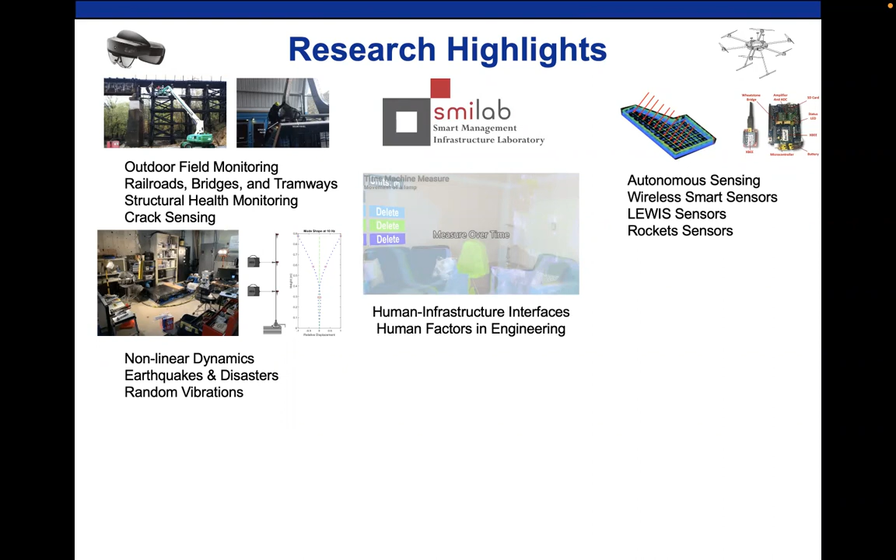With the national labs here in New Mexico, we are very lucky. We are working with Sandia National Lab, Air Force Research Lab. In particular, some of the work I present here today is with Los Alamos National Lab. They are a little ahead in terms of dynamics. We're doing some nonlinear dynamics that I never thought I would be investigating, and we're looking into these multiple input, multiple output areas of interest.

With the Navy, we have some support or ongoing efforts related to the cybersecurity of SHM. So when we have all these sensors, I'll be talking a little about community centered SHM. How can we protect from attacks that are not only physical, but also cyber attacks?

Here, in terms of augmented reality, I'll show some of the work the students are doing. One is on dynamics, another is in cracks, and another is in sensors. So let me bring this down. We have some interesting work with the students in mechanical engineering, actually, so that's why I need to get this cross-appointed. In order to be mentoring students in other departments, they recommend that you become cross-affiliated. So the University of New Mexico encourages this multidisciplinary participation.

So let's get at it with the outline: SHM, community centered SHM, then we'll talk about the human data interface and augmented reality, and conclusions.

For the infrastructure, all this decay or these maintenance concerns or repairs in America, we have the American Society of Civil Engineers. They have a community with the government, where we go and talk with the senators, and with the senators we talk about giving a grade. Actually, the senators say this report is the most useful tool they're receiving in Congress for asking for money.

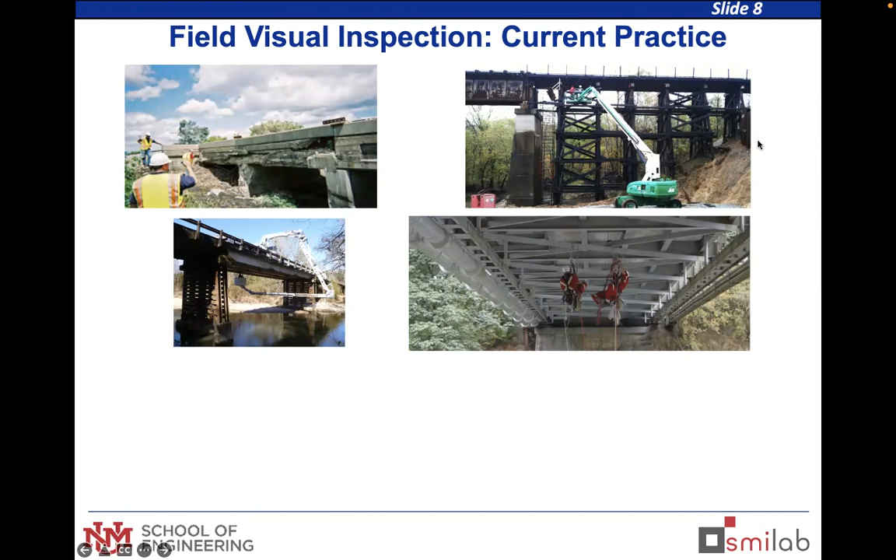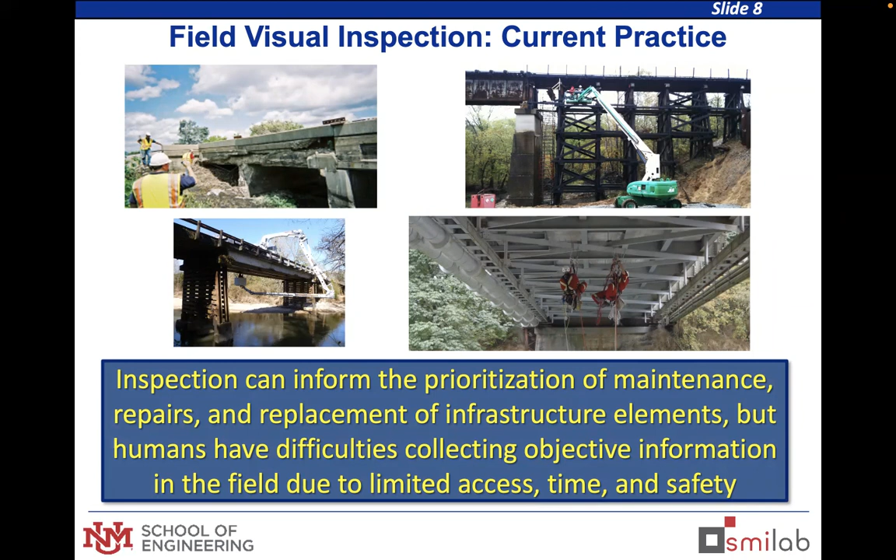Regularly looking for changes. So the core of this presentation is not replacing the human, but helping the human. The humans are good, experienced, and have knowledge, and we want to support the humans doing that great job of inspecting bridges. It could be other structures too. So today, if humans are the ones collecting this data, let's help those people who are doing the job, the inspectors.

The SHM community, we are working closely with them. I have a little video here. Let me see if I can lower the voice for the sounds. And we are collecting data from many ways, not only sensors, but also doing some robotics, instrumentation, and drones.

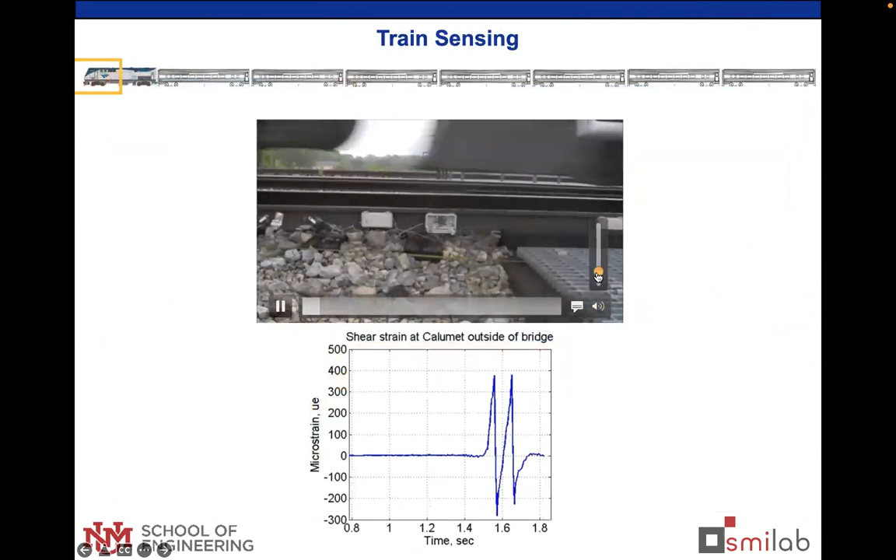And stemming from here, we have information. This is some of the work that we did at the University of Illinois near Chicago. Chicago is the hub of the railroads in North America, where with these sensors, we can obtain real-time information of the loads, the direction of the train, the speed. In this case it was an Amtrak passenger train going northbound, 80 miles an hour.

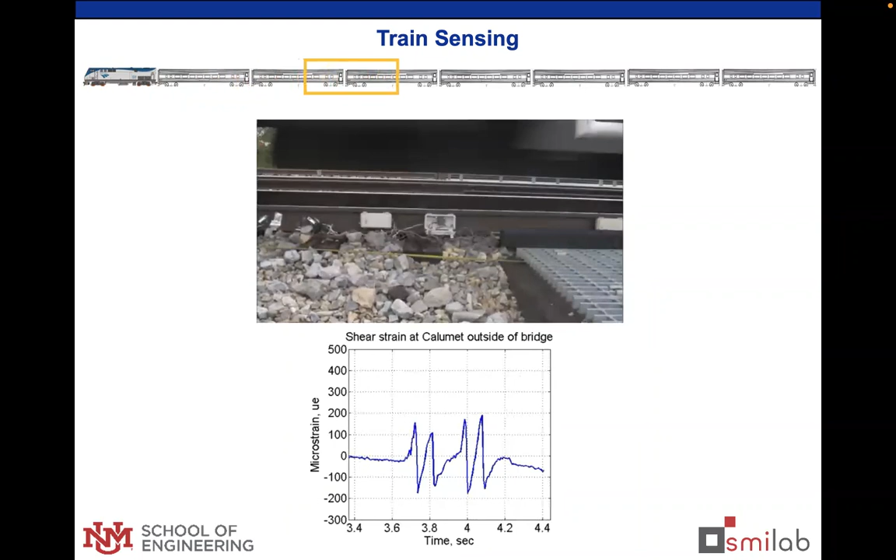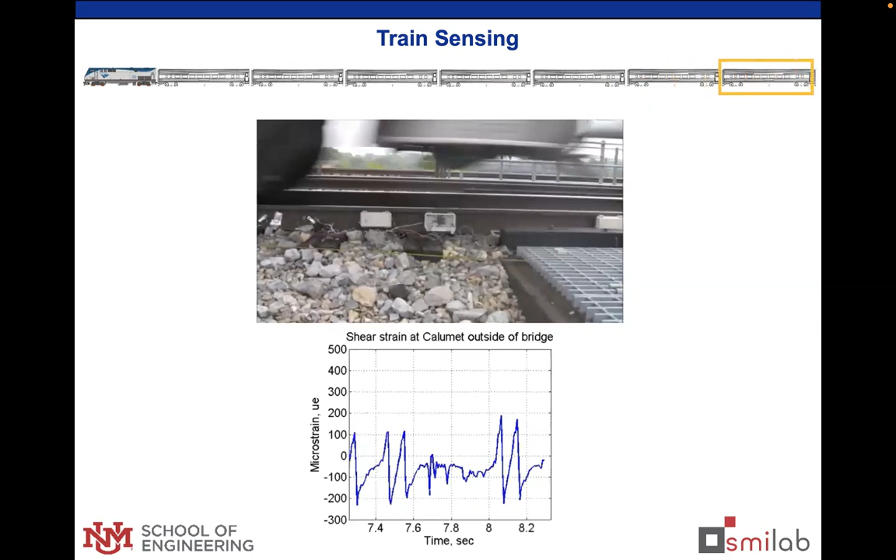I forgot to close the box, so that's why you see the vibration of that wireless sensor up and down under the wheels. That makes it look very cool. And with the strain, with the 45 degrees, we can obtain this information that will inform us of the safety, maybe improve management of the traffic, and also coordinate maintenance operations based on data. So this is what we've been doing for a few decades now, and we are very successful advancing the topic.

But one of the challenges has been the interface with the community. Some of the solutions that we found with the assistance of sensors is developing low-cost sensors. This is an approach that we do here at the University of New Mexico. We call them low-cost efficient wireless intelligent sensors. And we tell them, it's not that expensive, it's not that complicated.

And also we can change the sensor for you. So instead of telling them what they have to measure, we ask them, what do you want to measure? And then we fabricate the sensor for you. We allow the community to tell us what they're interested in measuring, and we will do it for them.

We also use it for teaching. I just wanted to shout out to the students, we have a class in civil engineering here where we teach sensors. Professor Chatzi is aware, in the International Modal Analysis Conference, we do the teaching of the sensor. So maybe next year, if you want to take this sensor class, you can build your sensor in half an hour and use it and see the data. Look at the students, how happy they are when we build this low-cost sensor.

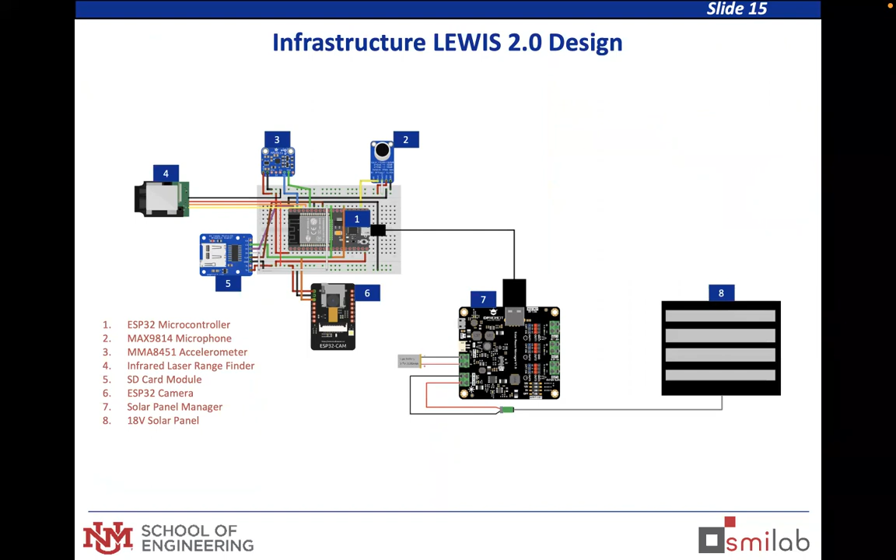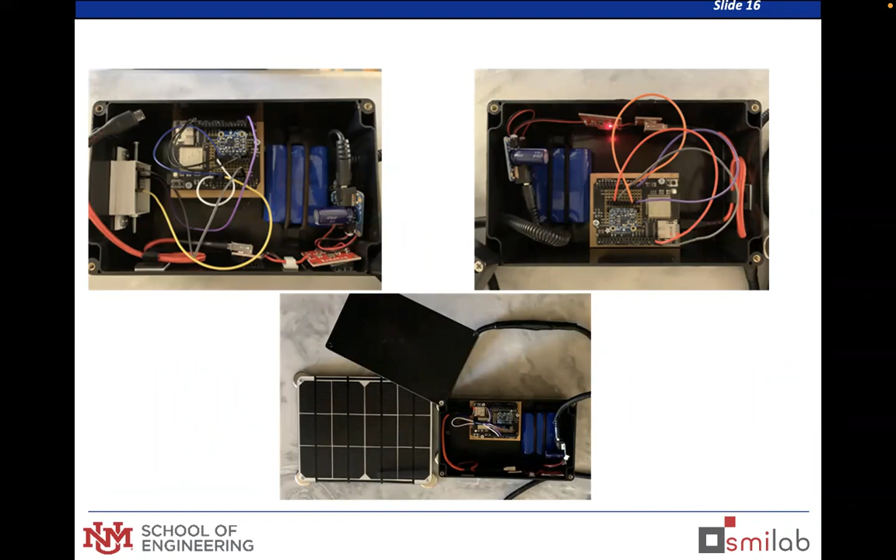With this low-cost sensor, the community doesn't worry about being charged a lot of money. And also you can tell them, hey, if you're interested in environmental issues, we can also change the sensor for you. This was work conducted with NSF and the Navy, and we developed this new generation of sensors. This was done by Joshua Murillo, and as you can see, it's a very crowded, busy box. This was the LEWIS 2.0 sensor version A.

And then we have interest in putting this out there to collect the remote sensing that we have for the community. As you can see, it's a good design. You have some level of organization, and we identify camera, sensor, water, turbidity sensors. But you can see there was a little room for improvement.

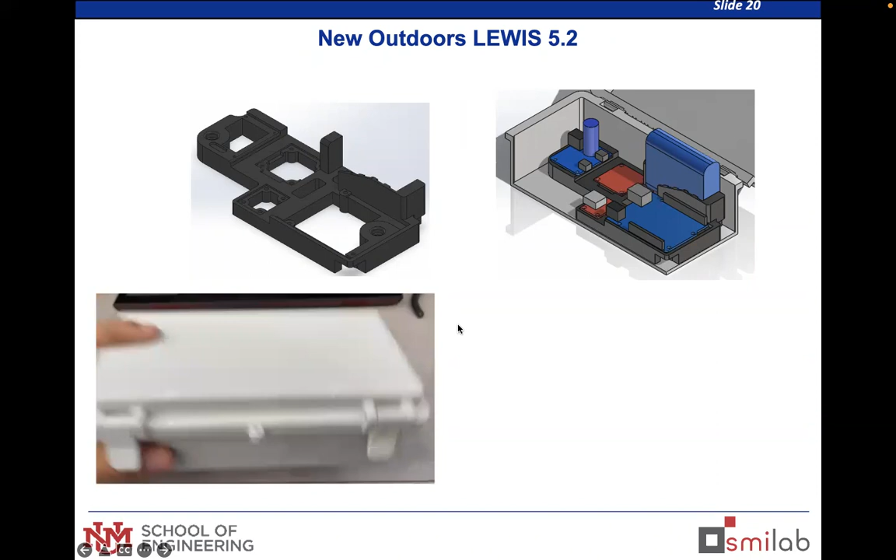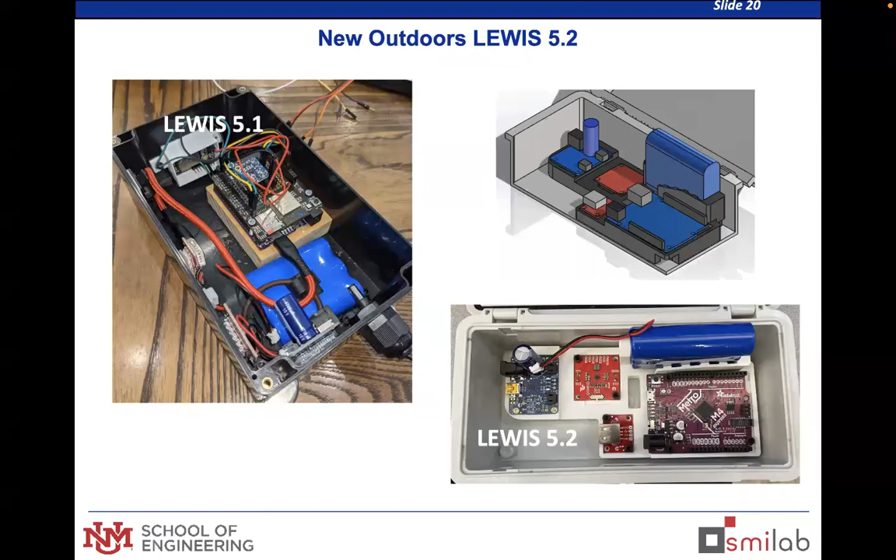So we did a version 2 based on the concern of the owner, and we developed a more advanced low-cost wireless sensor, 3D printed, done by Solomon. And as you can see, the new generation is so much better. So the community again tells you what to do with the sensor. When you allow them to criticize your sensor and you fabricate it again, you empower their understanding of your technology. So that's been one area of value.

In North America, with our recent history of collaborations with Native Americans, we identify there is advanced knowledge in the environment among our partners. We have a project with Smart and Connected Communities where community-centered research enables the adoption of technology, and that's what we've done here with the Ohkay Owingeh in New Mexico.

They are the ones who informed the sensors. When we told them we wanted accelerometers, they said, hey, we want water levels. So that's what we did for them. We developed a low-cost sensor where they can measure flooding in real time. They can use it for emergency planning, and they have these fragility curves for community-informed decisions. So instead of telling them what they have to do, they tell us the framework they want us to develop, because they're very interested in the respect that water is sacred.

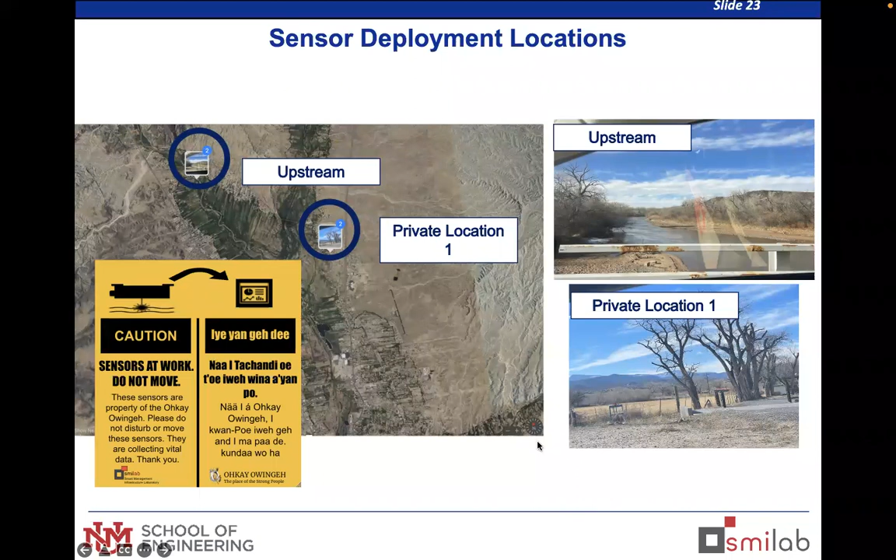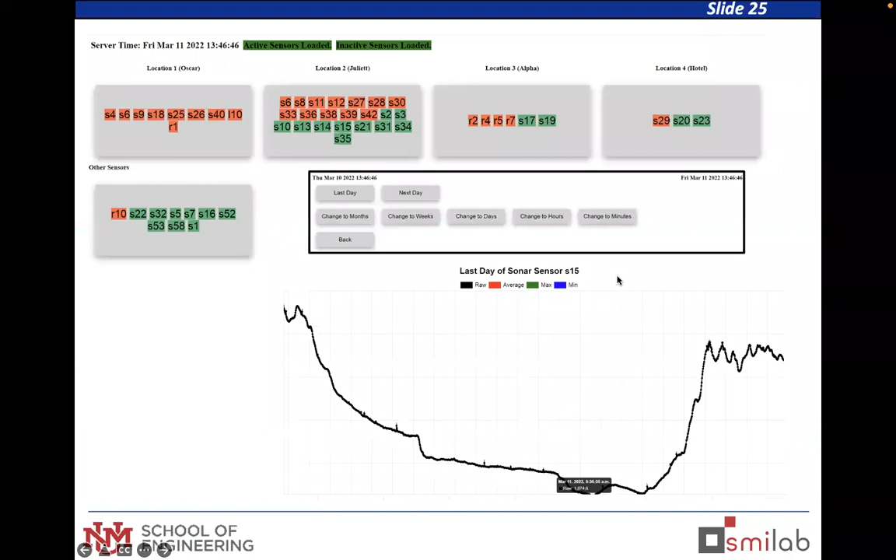This is the interface where we have these water sensors shooting down to the Rio Grande and collecting the change of water. We have this interface where you can see the water levels — this was from a couple of weeks ago. So it's been a very successful community intervention.

Let's scale down this trust in data to the human level, and I'll show you why this is important. When you have this structure with the inspector and you're talking about real-time visualization, if the inspector doesn't see the sensor data in real time, they don't trust it. Also, the database being modified with this sensor data has to be usable for decisions or liability — they want to use it for management and make decisions in real time. So those are the challenges we identified between the human inspector and our sensors.

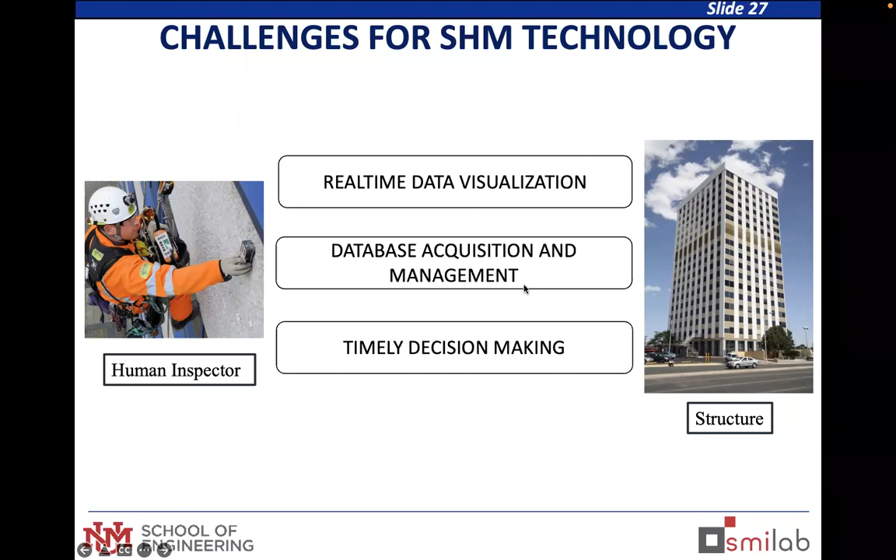So we're trying to make it very clear, in the event of an emergency, why the human-infrastructure interface is important. If you want to rescue people or make timely decisions during a disaster, you need to share that data and give the human the ability to change that data in real time. So this automation helps humans better interact with their environment — the data is there to help humans interact with their environment better. That's what we're trying to do.

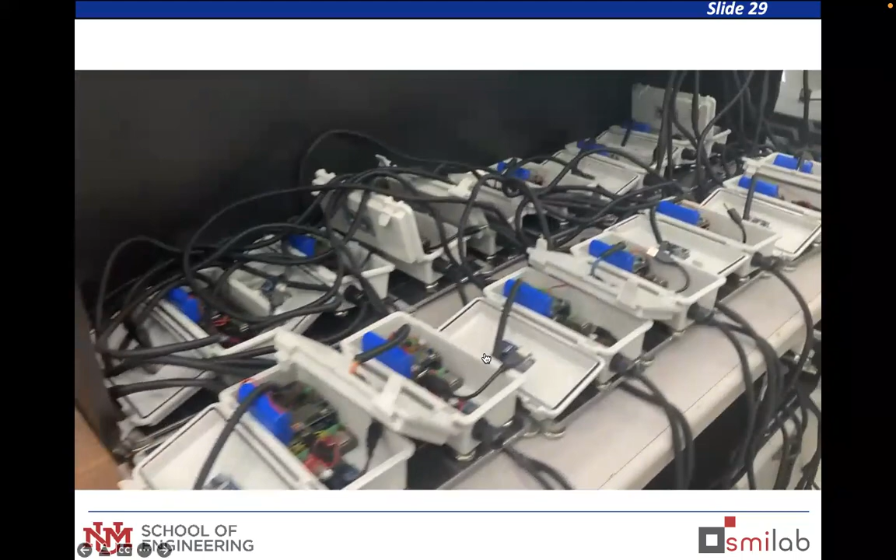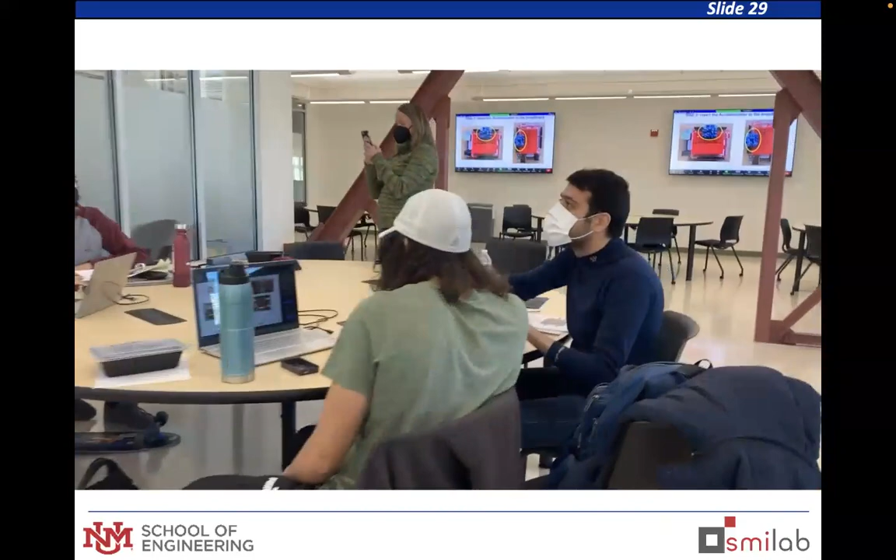This is a short video about how we build this thing. These are some of the 3D printers where the students create hundreds of sensors for the Ohkay Owingeh. This is our approach — teaching the class where students build the sensor in 30 minutes. You can see some of the Navy guys there teaching the class, and this is some of the building against the clock. When you build sensors in half an hour, you trust the data from that sensor the same day. So we're changing civil engineers' fear of sensors by actually teaching them to build one.

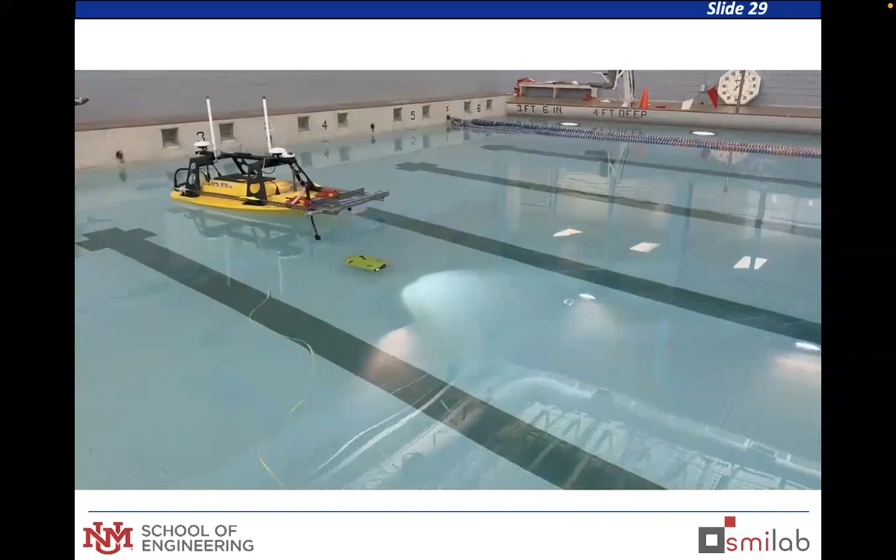This is in California, one location where the Navy wants us to measure the water level in the sea instead of the Rio Grande — no problem with that. This is an upcoming effort: we're going to do augmented reality above and below water. This is the chasing of the underwater vehicle with the boat; we have some of our sensors mounted on the boat.

We're also looking into human-machine interface, maybe the quality of the interface below water. And at the end of the presentation today, I'll show how we can conduct safer inspections out there on the mountain near Los Alamos.

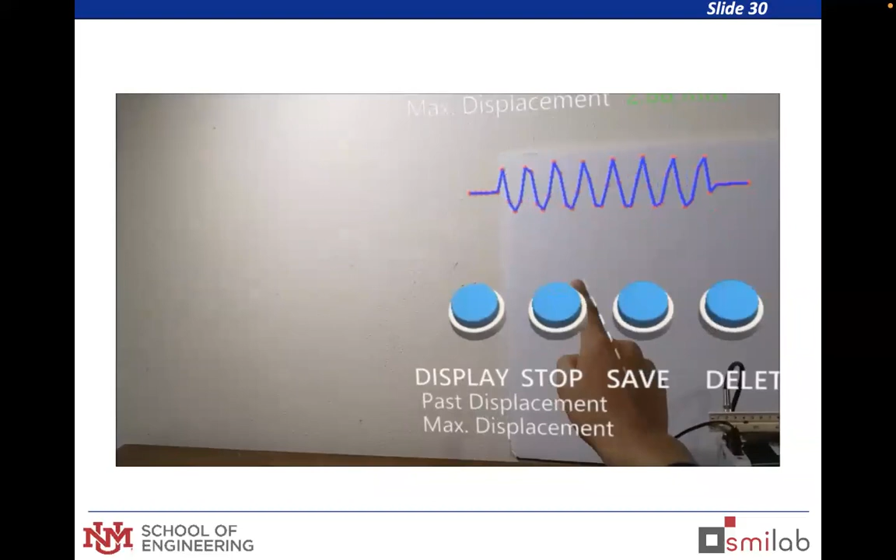The data you see here on the screen is programmed with augmented reality. We do everything with Unity. So we not only build the sensor, now we program everything in Unity so the inspector can see the displacement in front of them.

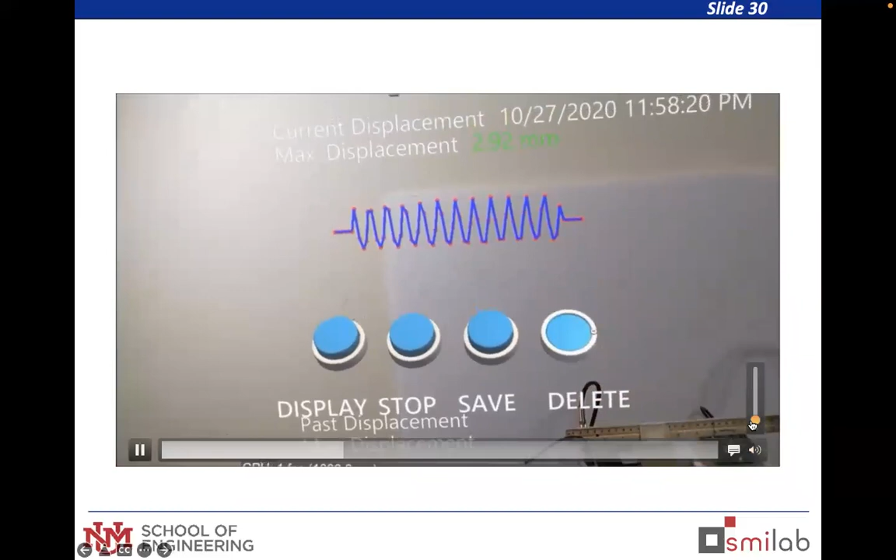This was done during COVID, so in reality we were not out in the field — this is in the apartment of the student. The train is inside the apartment, moving right and left, and with this movement we can change the decision. The decisions we made before concerned the speed of the train.

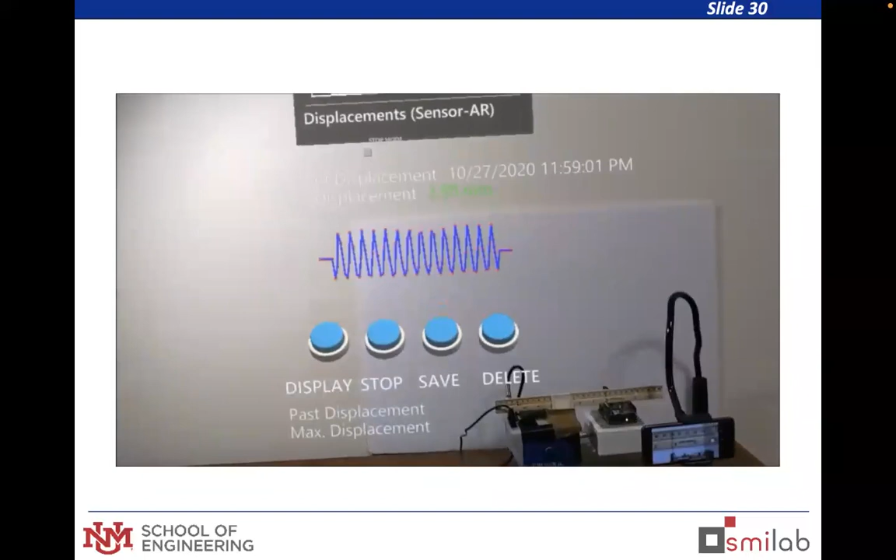If you see that the displacement exceeds a threshold of concern, you slow down the speed of that train. That's the decision that the railroads make. So instead of telling them to look at the data at the office, you look at the data on the bridge in real time. The student was Marlon Agüero, he programmed everything that you see here. So one message I give for those interested in augmented reality is it's 100% about programming. If students don't like programming 100%, then they should look for another topic.

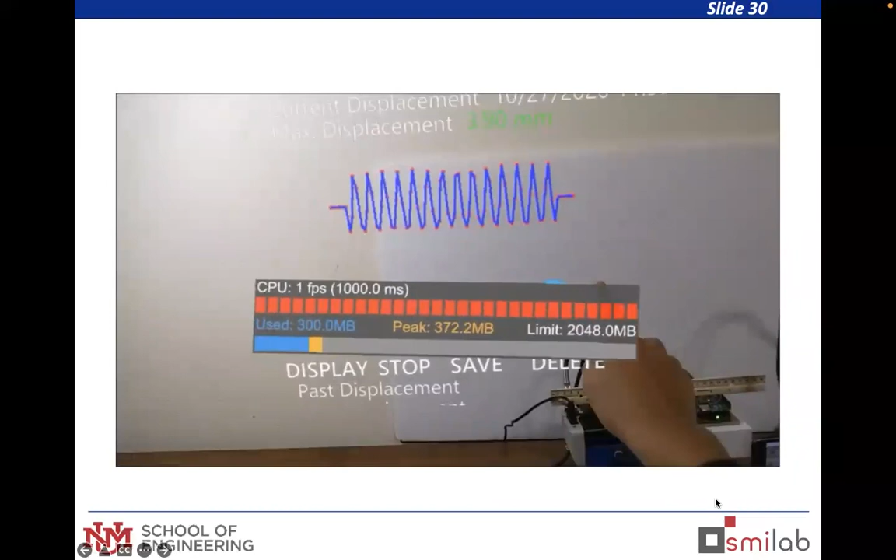This is a collaboration with Tao at the Chinese Earthquake Administration, where we hit a railroad bridge and wanted to do the inspection in real time with augmented reality. Actually, this is a 5 year old video. This inspector cannot carry iPads or iPhones, because they also need to climb these bridges.

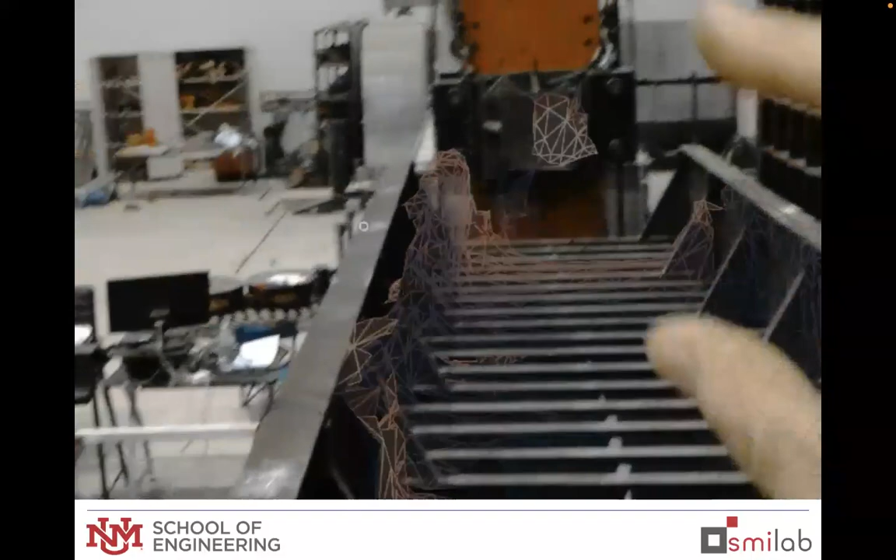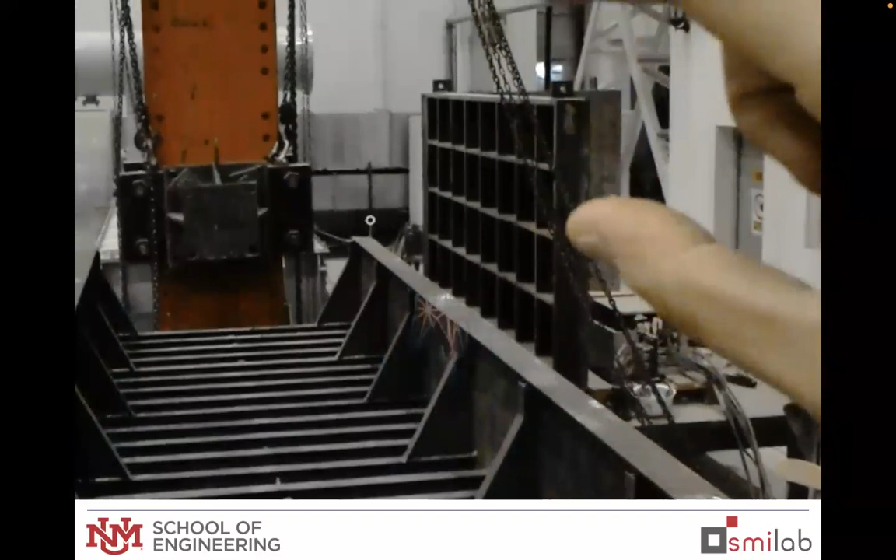As I mentioned, I dropped some cameras into the river when I did this bridge inspection. Here we climb the railroad bridge, using both hands going up the bridge to the cross beams, the knee braces, all the through-plate girder at a 1/5 scale, and collect this 3D mesh automatically with the headset. This 3D mesh will enable me to create this time machine or deploy my data. I'll show it at the end of the second half of the presentation. We are almost there, showing how these applications use this 3D mesh for information.

We are talking about human cognition, working with leaders in workforce training, development, educational psychology, and scaffolding learning. We are advancing the training of inspectors so they can accelerate known skills or acquire skills much faster. This is David Mascarenas, my colleague at Los Alamos, we've been working on this since 2016. This is the HoloLens 1, I have everything now done with the HoloLens 2.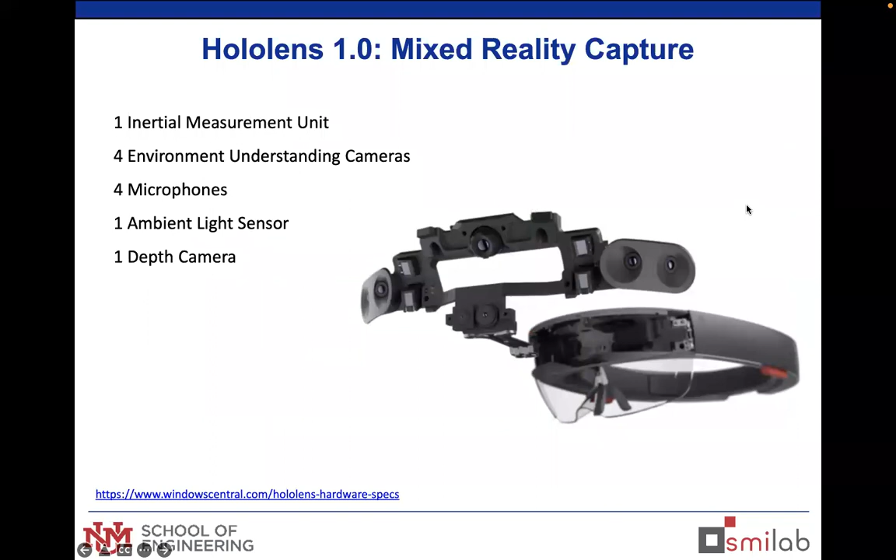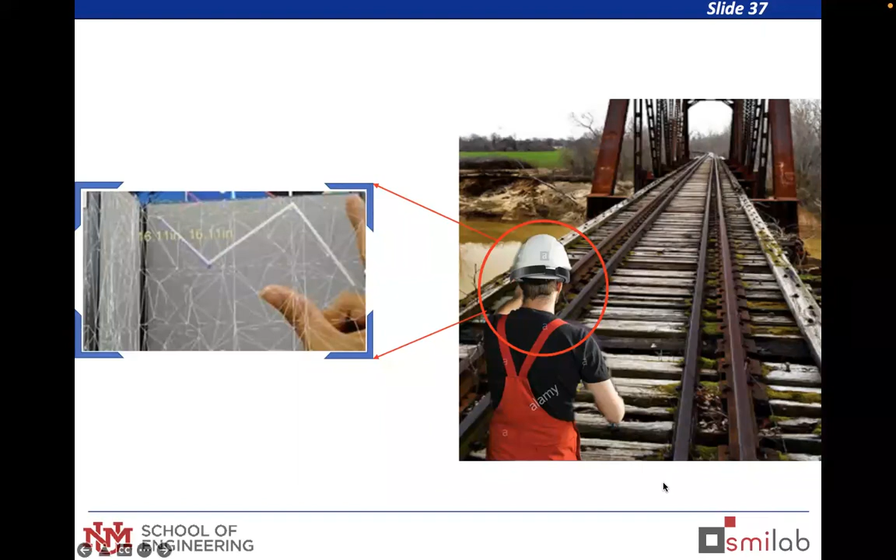This is the application domain where we do all this. For the interfaces with the railroad, we have a lot of interest from the Federal Railroad Administration, the Transportation Research Board, and some of the railroads in North America to assist the inspectors on the field. Safety is the number one concern, so we are looking into accelerating quality, increasing safety, and reducing time.

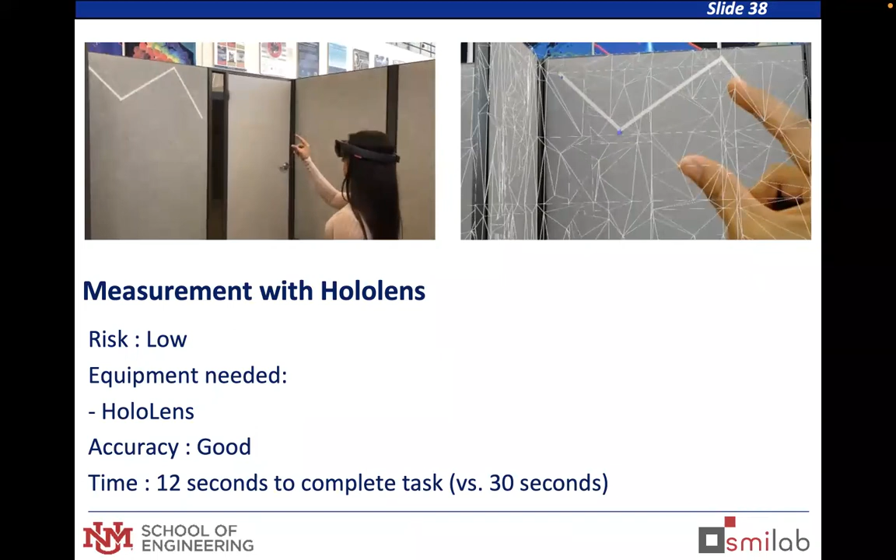This is Somi Chavez when she was a senior in civil engineering. She was working at Los Alamos, and now she went back and worked with them. She also worked as a bridge inspector, so she wanted to have this application with Marlon for a faster inspection. Instead of 30 seconds, it's 12 seconds, even more accurate according to the Los Alamos County engineers, and safer because she doesn't have to climb with tape on the wall to measure these cracks.

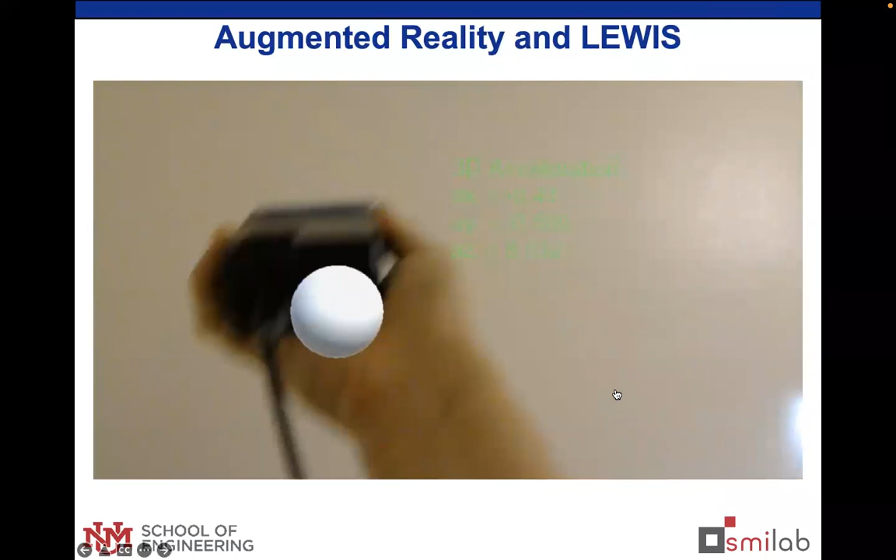Another application, this was by Fry Xuan. He was in computer science, so it was his idea. He said, hey, we don't want to see numbers, we just want to see a big bubble moving when I move the sensor, and if it exceeds the threshold, it will turn red. So when you work with different departments and different students with different backgrounds, they have better ideas than you could even think of, and that was his contribution.

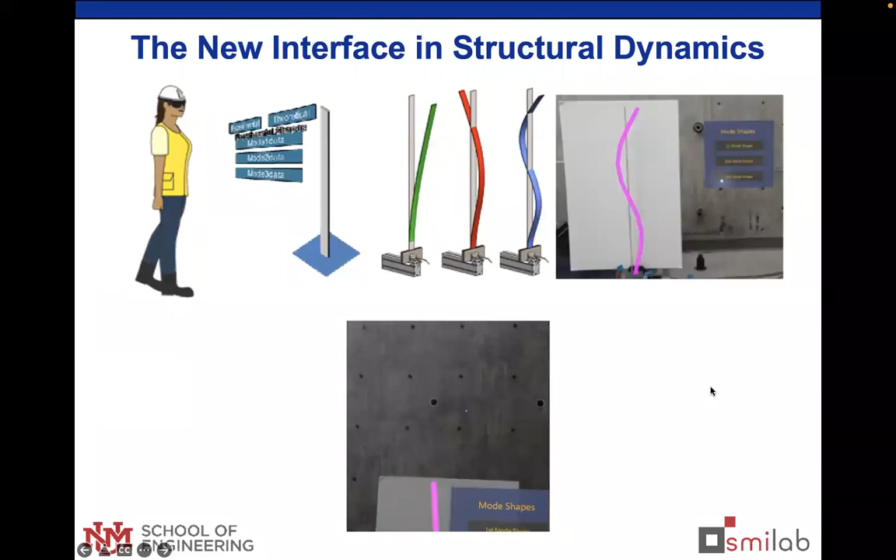This is developed by Jack Hanson and Maimuna Hossain, mechanical and computer science, and we're also going to do a new phase on mode shapes in the class. We're going to teach this actually this week, modal analysis with the overlay of mode shapes on the structure. This is a lab setup where we have a cantilever beam. You have the first mode at 3 Hertz, and then the second mode at 18 Hertz. I'm going to show this with the mode shapes in the lab, and you can see how the pole indicates a location, and we're going to try to change that in real time within the second mode here.

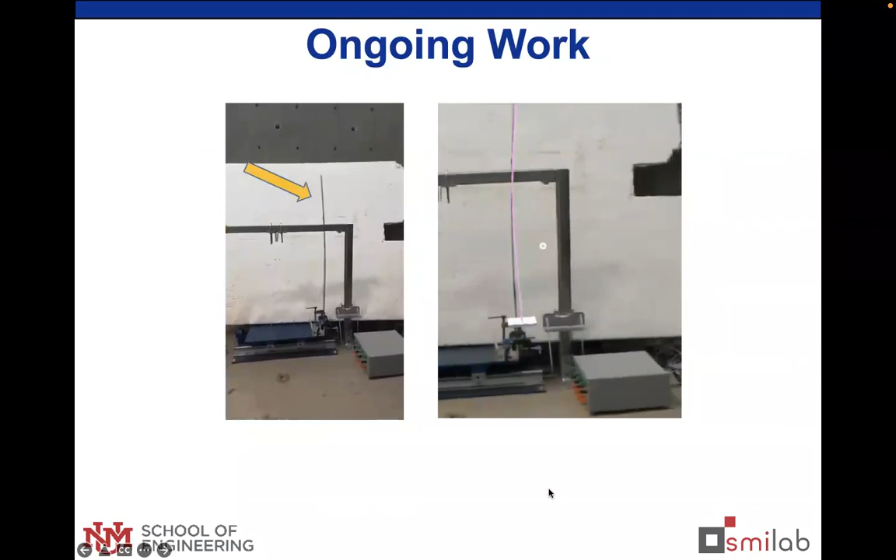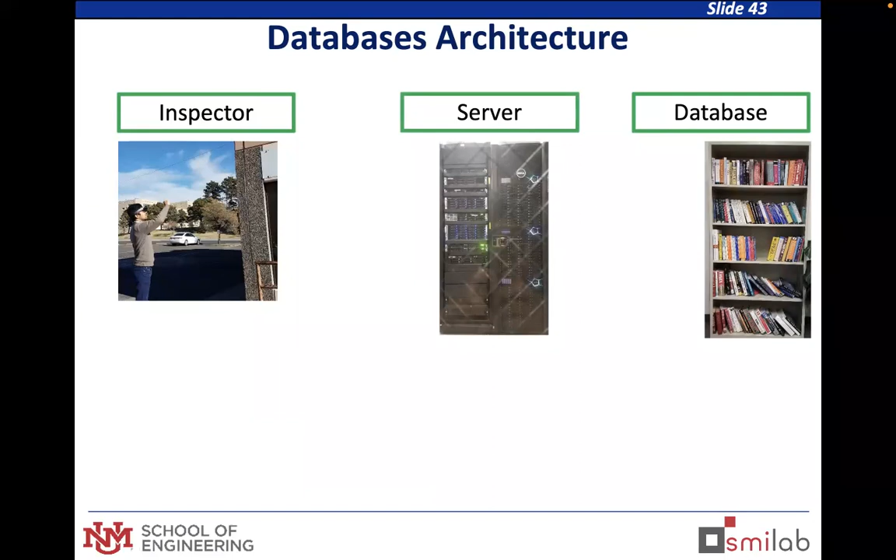In terms of the databases, this work was by Dilendra Maharjan for his master's. We have an SHM article on this access to database. In terms of industry, this is the highest interest, collecting this database, maybe your bridge data record, or maybe your bridge model in the CAD drawing, and updating it like a recall of your vehicle when you had to replace a part of your car. The database updates, and you have that on the system, so you could read it with your QR code scanner and overlay it in front of you. This is how you have this interface with the physical structure.

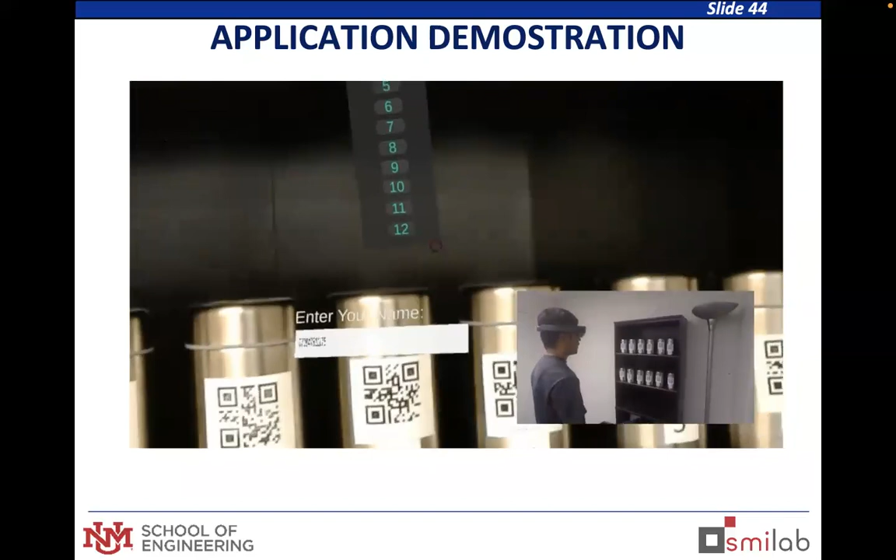So Dilendra was working with the National Lab. We're looking at these canisters and how you could measure this information without touching or opening the canisters. We presented this in 2018, and you have these 12 canisters with different information inside. We scan the QR, send it to the database, and we created a socket between the wireless headset and the database. The database can be changed, updated, or improved, and every time we go to the field and read our QR, the information we need opens up for us like this. This is very useful for industry, like pharmaceutical industry, where you have this amount of changes on the information you want to cluster and access remotely. That was very useful.

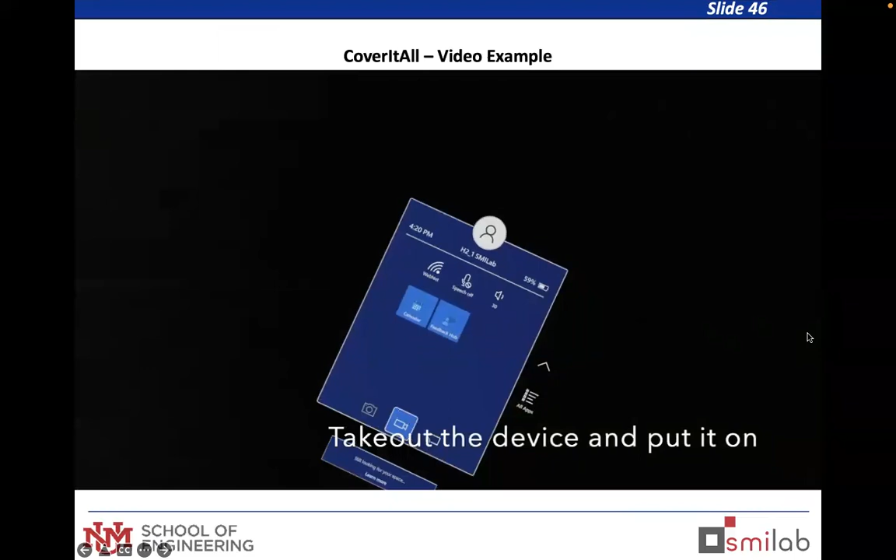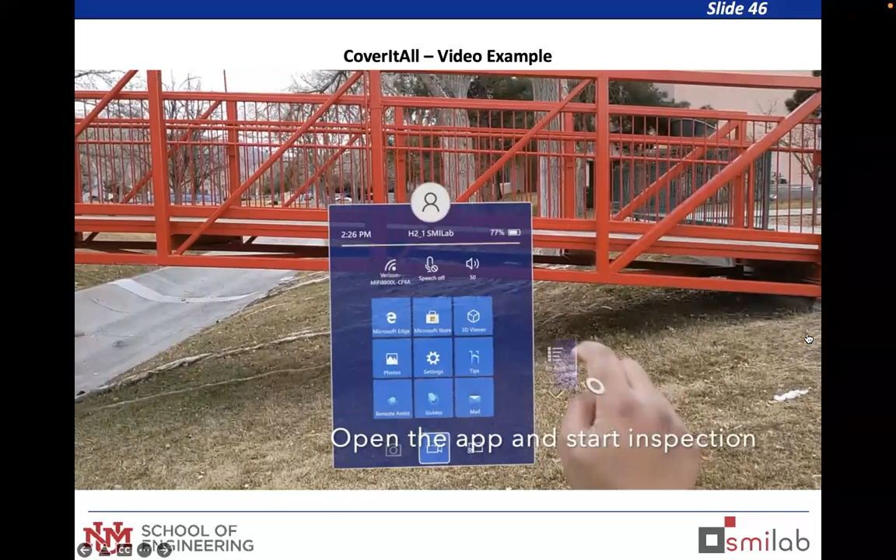Another application, moving to the next one, is eye tracking. We're using eye tracking not only to identify patterns but also to enable self-training of bridge inspectors. So you can see how we obtain this information. Eye tracking isn't a new area, it's been done for decades, but we're using it now in the context of bridge inspection. I figured this would be of interest to see. You have this information on-site, and you can get a score of the inspector based on the information they collect on the elements, the time they devote to each area, and also a private score you keep to yourself to improve your own inspection.

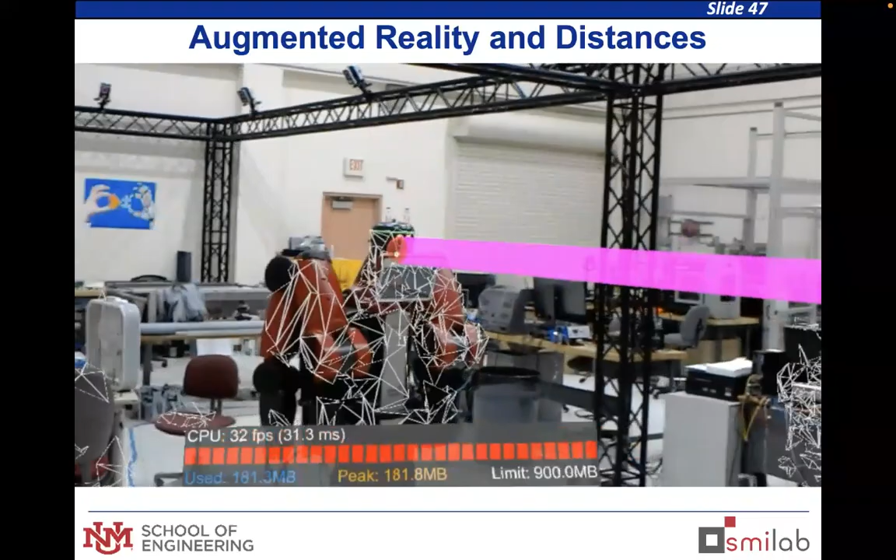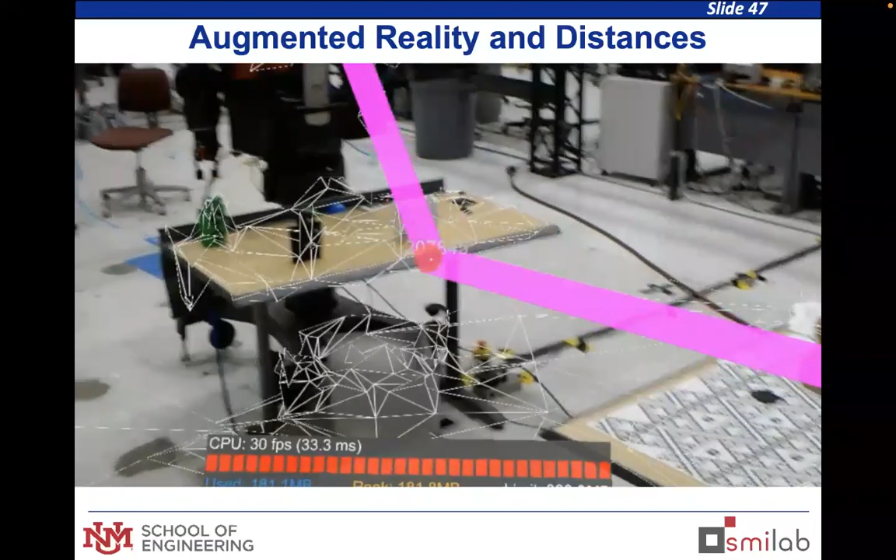This is the Air Force research where we wanted to explore collaboration with robots. We've done more since then, but this is a Baxter robot. They're kind of old school, but we like them because they're a similar size to a human. We're doing some additive manufacturing for remote fabrication of high quality, low volume 3D printing. That was the context of this center, and intelligent manufacturing or intelligent assembly collaboration.

This is a collaboration with the New Mexico DOT. They are strong supporters of our approaches, and they're interested in transforming the academic interface into the bridge manual that they use for inspectors. So we're proposing collaboration again, where the bridge department will dictate which AR they want to see, and we just do whatever they ask us. That's what we're interested in doing.

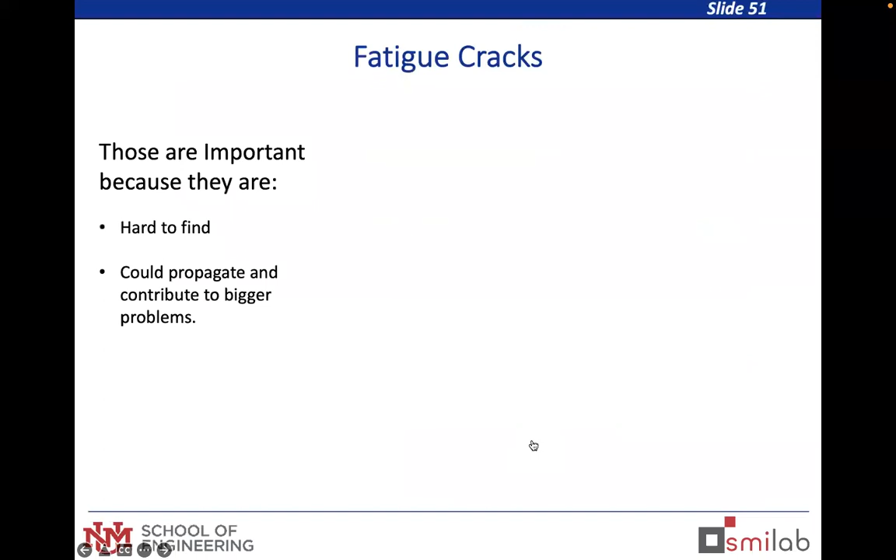This is a collaboration with the University of Kansas. They're very interested in fatigue cracks, so we partnered with them to collect this interface of fatigue cracks on live loading activities with Professor Jian Li, and we went there. This is actually a 2-year project, so this is at the end of the first year. We went there and showed the app on their bridge.

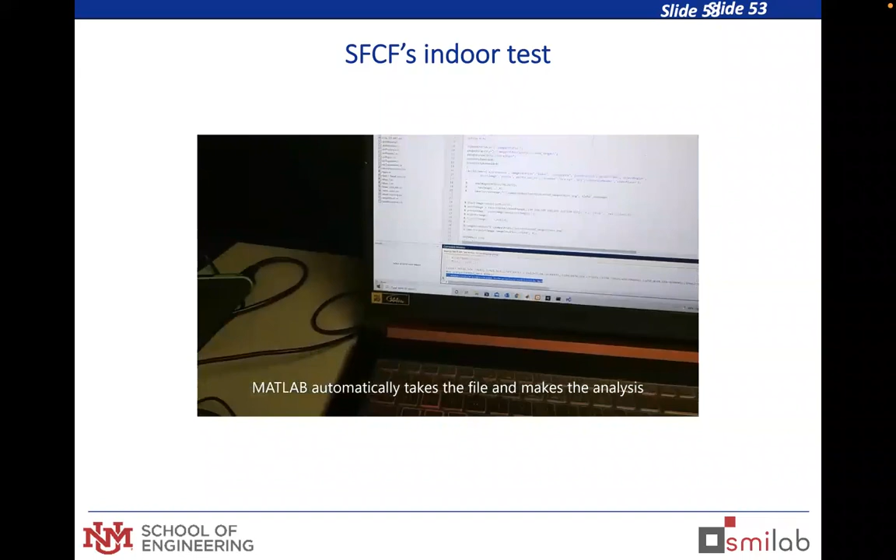This is the menu that we created. We have some upload of the video, the socket goes to MATLAB, MATLAB does the computer vision, the computer vision generates the hologram, and the hologram is deployed and anchored in front of your specimen. This is in our laboratory at UNM, where we have this fake crack in a little COVID laboratory where you have the opening and closing. You send it to the computer, it makes the analysis, and generates the hologram or spatial identification of the features.

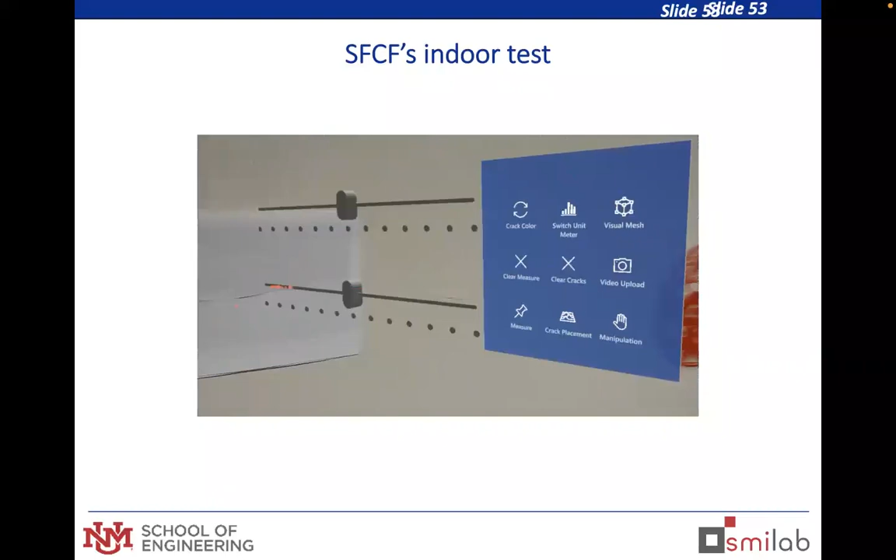And then we create that hologram in MATLAB, then send it to Unity. Unity transforms those points into holographic values that anchor on this mesh that we create. And this is how it works. So this is how we did this with them in December.

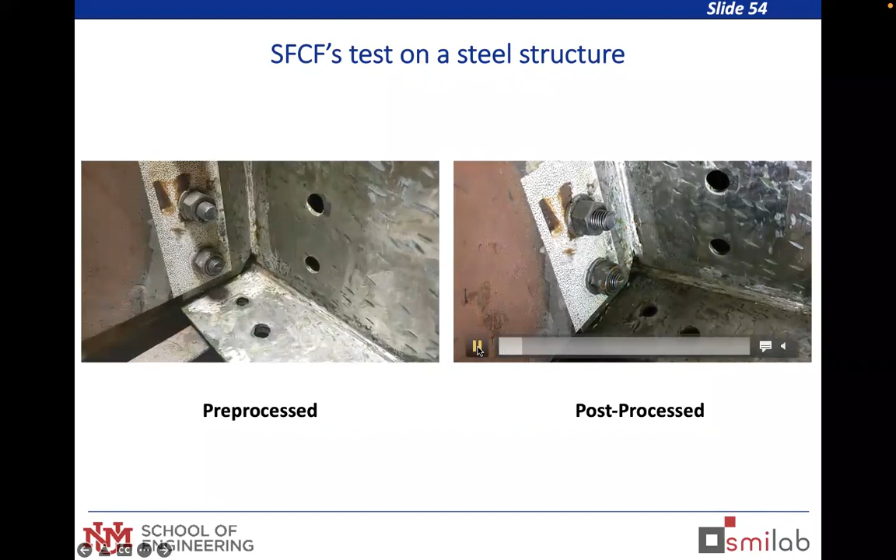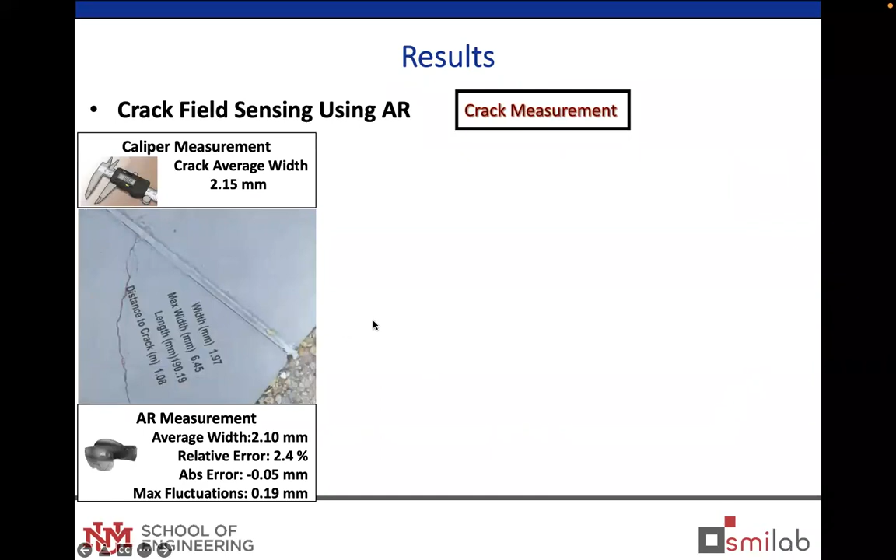For concrete, we have another project where you could have this combination of AR and AI, and this is the results we have in the field. This is different average crack width, done by Kade Malek, and we have decreasing average width, and the quality of accuracy is nominally the same. Again, it's for the inspector to see in half a second the crack in front of them at the site.

To conclude my talk and enable some people in the audience to ask questions, I think Eleni, Christian asked me not to take too much time to enable this interface. I have the last few slides about the future, so maybe that motivates some of you to ask questions.

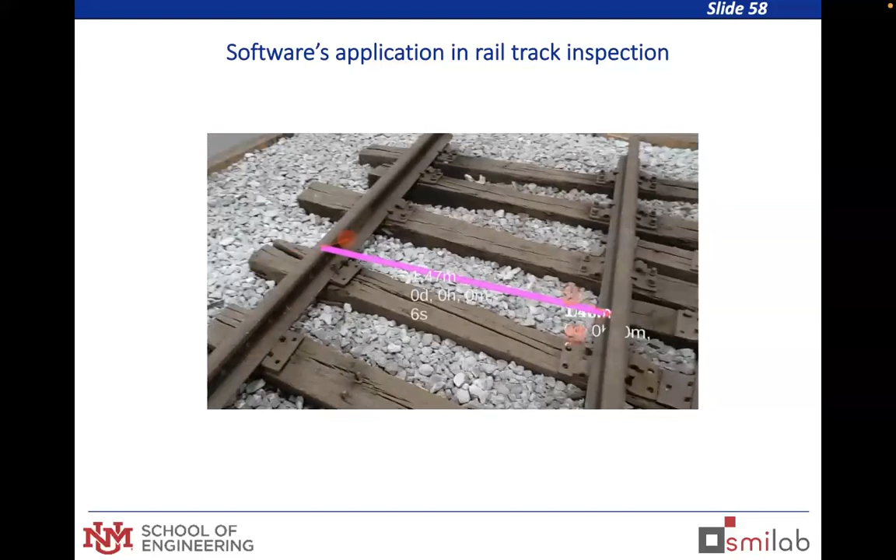Some of the work we have is with the railroad. We are interested in having this training. This is an indoor facility on the track where we can do rail gauge measurement, which was something they wanted to do. Instead of bending over the track and collecting this data, we just do real-time gauge track measurement. The value is for them to learn faster, but also to accelerate their current ongoing operations.

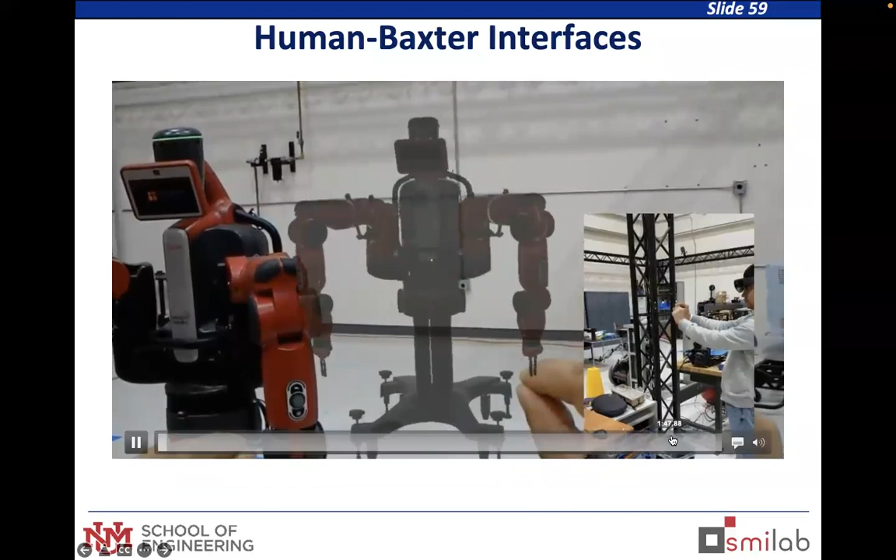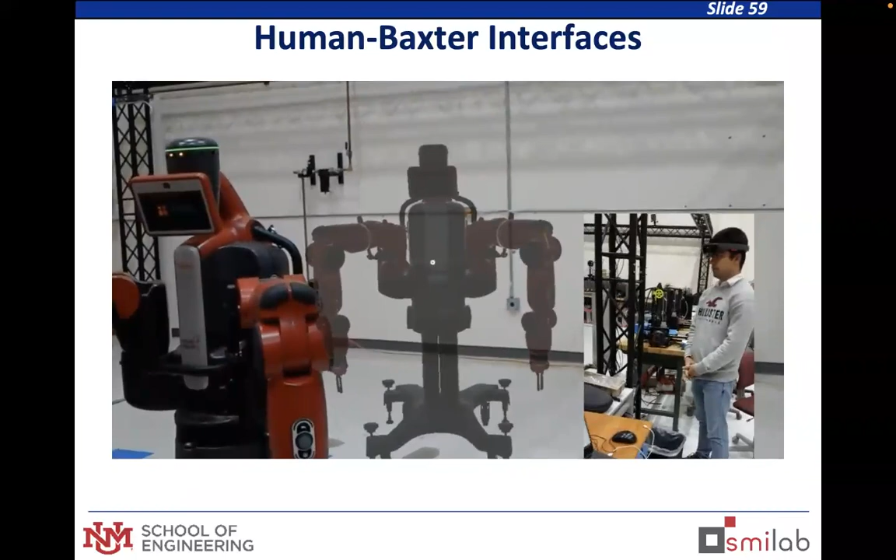This is a ROS Unity interface we did with Dilendra, who was taking this class. The Baxter has value for us because it's human-sized. We are using the Kinova that I'll show next. Here it was just to show how we can control the robot by controlling the hologram. In a second you'll see Dilendra moving the two of them simultaneously. There's a little delay between the gesture and the robot, but basically they follow each other. Similar experience as before, but safer, and coordinating human understanding or cognition with the robotic interface.

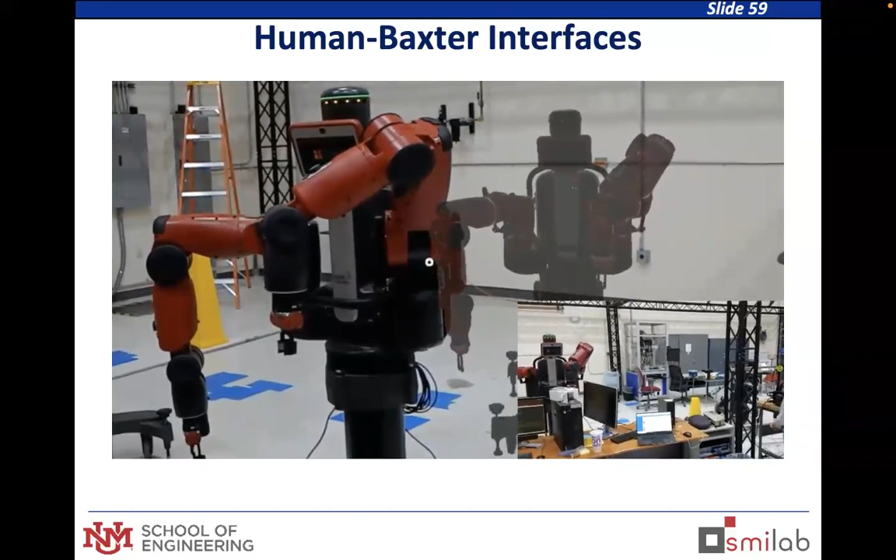We try not to automate 100%. We like the human intervention. With the human intervention, we believe there is a collaboration, like a robot-human collaboration, a cobot.

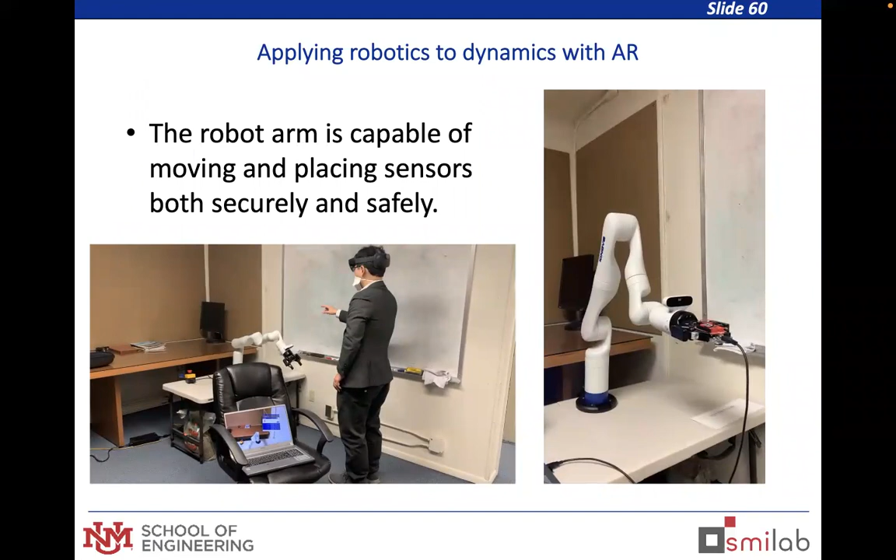This is a recent video where you can see how we control this Kinova 3. We like to coordinate the local sensor with the Kinova, and we're also trying to demonstrate how we can control this activity with a gesture only, to increase safety.

Let me go to the next one. Toward machine learning and artificial intelligence, we're very interested in this cobot, or collaboration with robots, where inspectors collaborate and some part of their value is the cognition, but we remove the automation or the repetition. So we created this with David Mascarenas at Los Alamos.

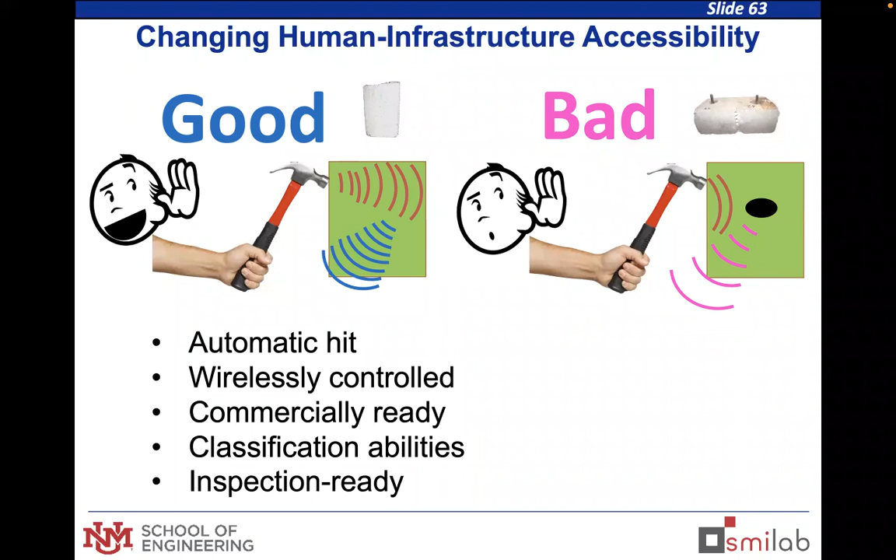In this, we can have automatic hit, wirelessly controlled, low cost, with classification abilities and inspection ready. When humans tap with a hammer to listen for damage, they use their memory and intuition, but humans are not very good for that, so we prefer to give that to the machine. This is the most sophisticated mechanism I will ever make.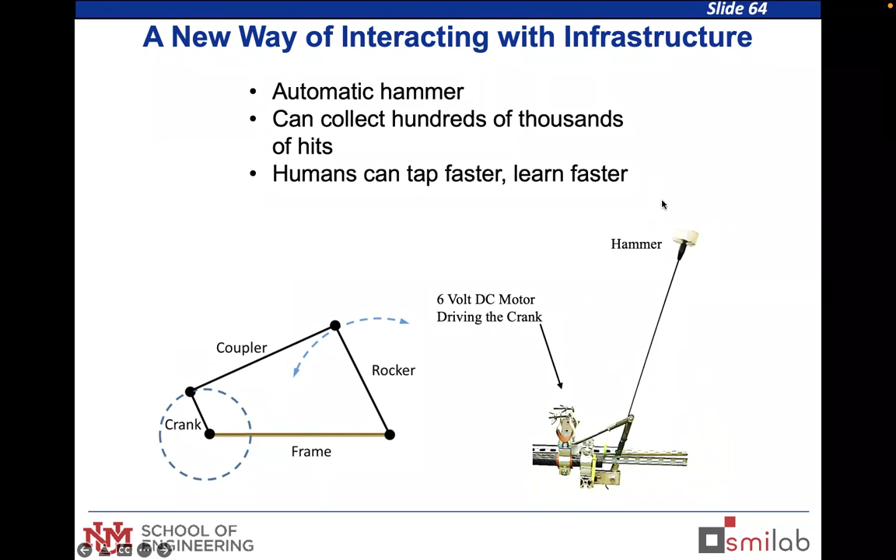It's a crank rocker, and I'm very proud of it. I did it with the help of David. It's a crank rocker where you can have repetitive hits, hundreds of thousands of them, with the same energy and same distance, and collect these sounds, because machines remember sounds better than humans.

This is how it works, and this is how we tested it with this crank rocker and a little solenoid. And then the next one is the sound. Those hits, we process that data to do an SHM of those hits. It's not accelerations, but computer vision of the sounds. And with that classification, you can see very successful results from 746 hits.

But we wanted to leave it there for the sake of showing everything. So even keeping all of your experiments without removing those first hits, you still have a very high level of success.

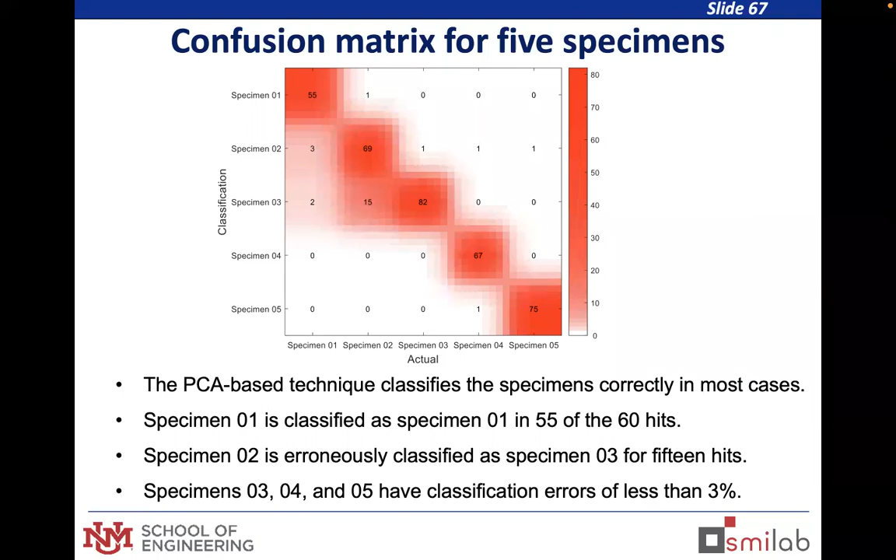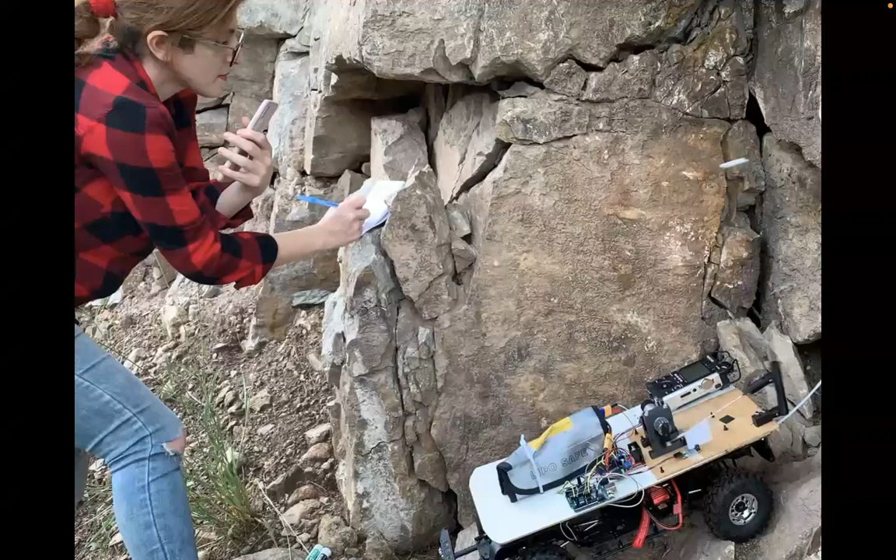Now moving forward, we created the ground robot. You saw the video earlier, and again, it's a low-cost platform where you can hit on the rocks, and we can inform on the health of your highway. In the Southwest of North America, we have a lot of mountains where we drive through the entire year, and because of the freeze and thaw, the snow, and changes in temperature, we have rocks covering the road. So we go out there and humans rappel and tap it to see if it's about to fall. So we propose to have this tap testing that informs, through sound, whether it's about to fall.

That's Roya Nasimi. She's now in Nebraska doing her postdoc. She was working on this at the end of her PhD.

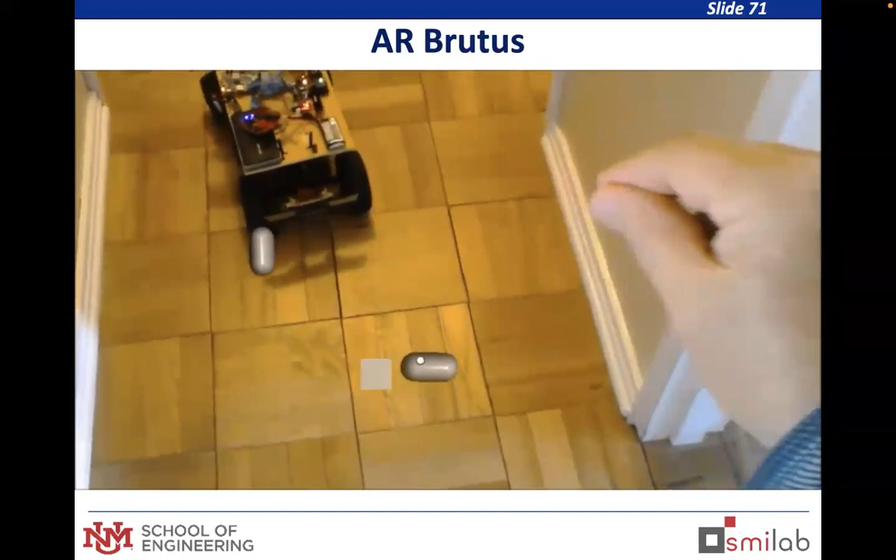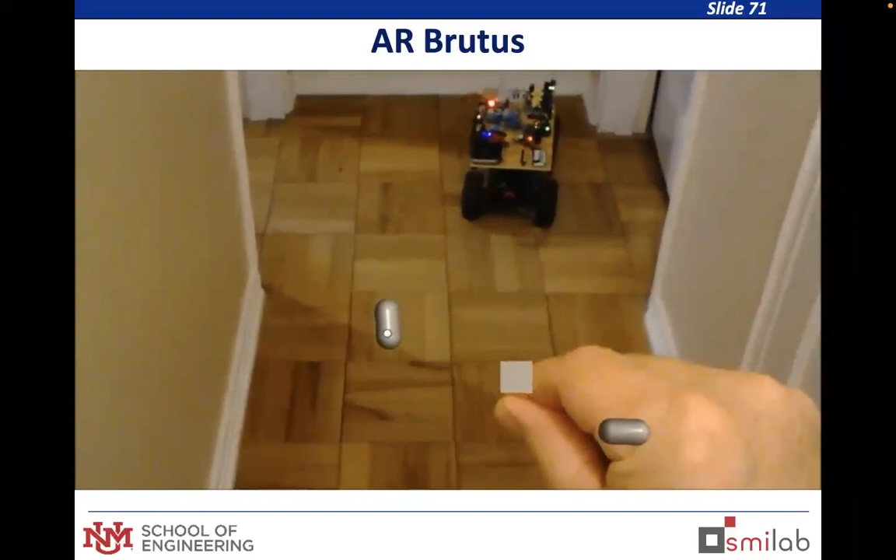Another futuristic interface is this AR Brutus. So Brutus is the robot. We provide the human with hands-free control of Brutus, where you go and move the robot where you like, no joystick. Basically now we're looking more towards dynamics coordination between human and robot, vibrations, with real-time response of the human to the activity of the robot. This is with Marlon Ball, done in COVID at his house. In this case, we were moving Brutus inside the house and taking it close to the area or the surface where he was going to hit.

I asked Marlon to hit the wall of the house like if it was a rock. He told me that was not allowed because of his wife. His wife would not let him hit the wall, but still he got close by and showed that if he would need to, he would hit the wall. But that was not an actual tapping because we didn't want to damage his house wall.

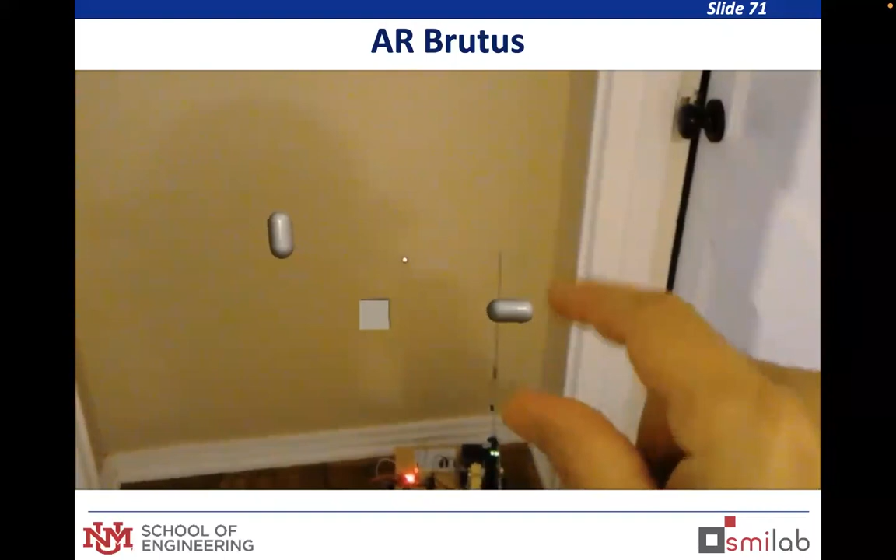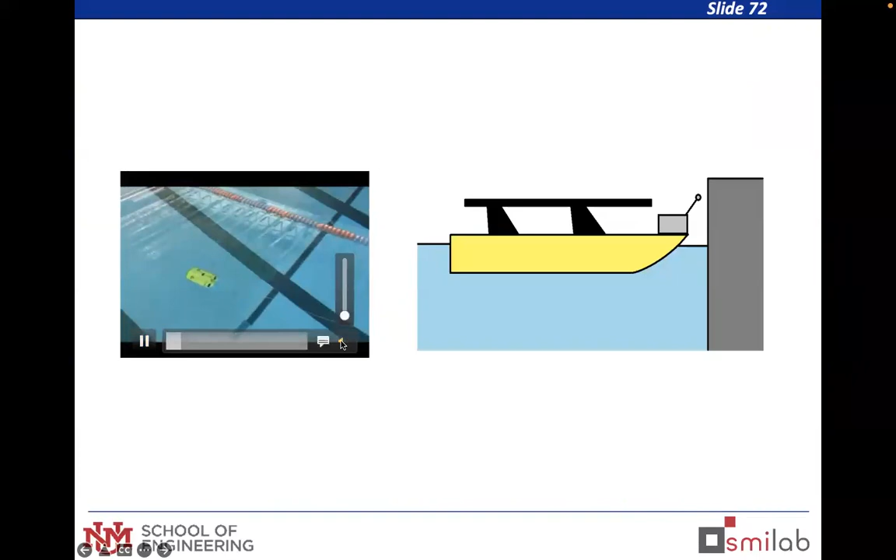And with the Navy, now we're moving on this underwater interface with moving objects, also with Brutus on top, and now we're developing an underwater Brutus for tapping surfaces or structures and classifying damages below water.

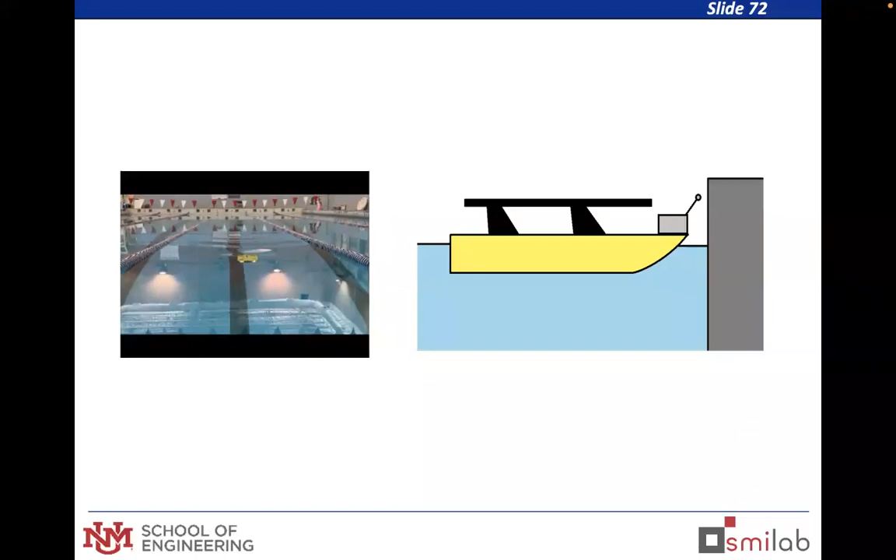First we build on the university swimming pool, and then we go to the lake after we've tested. It's not as cold at the swimming pool. And this is the laser that we developed for capturing this underwater activity.

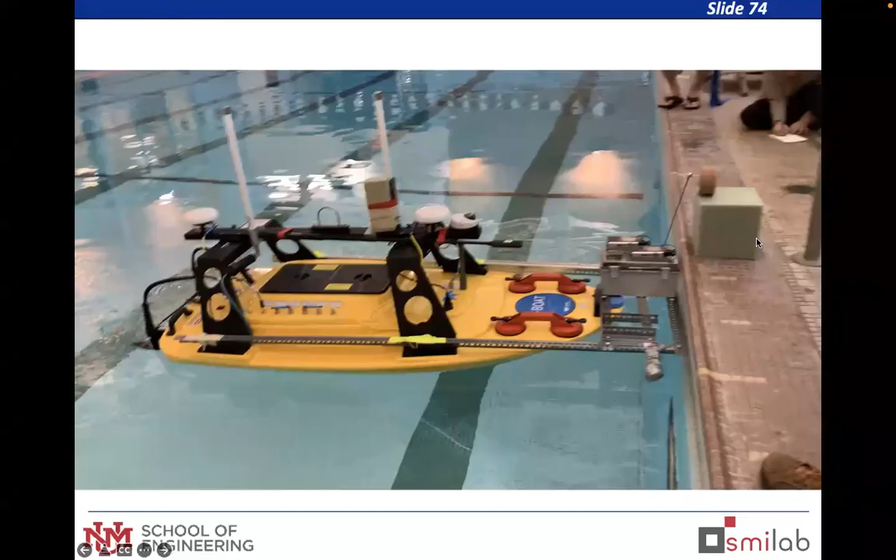This is the Sea Rapid boat from NSF for disaster emergency reconnaissance. We use the same boat with the University of Washington. They came for a few days and were extremely helpful, because we couldn't have used this boat without their help. So thank you for their help.

So to conclude, I just wanted to allow 20 minutes for people to ask questions. I have talked too much. I wanted to share with you new advances in technology that can contribute to objectively informing humans about their surroundings. Again, it's a community-centered, human-centered interface. We talk about new interfaces, human infrastructure. We think that's the future. So for MARS-SHM, I think that's what you are doing, talking about the future. We believe the future engineer, manager, inspector, owner will be collecting and analyzing data on these interfaces. We are proposing to see, measure, and collect data faster, enabling changes on decisions in the field.

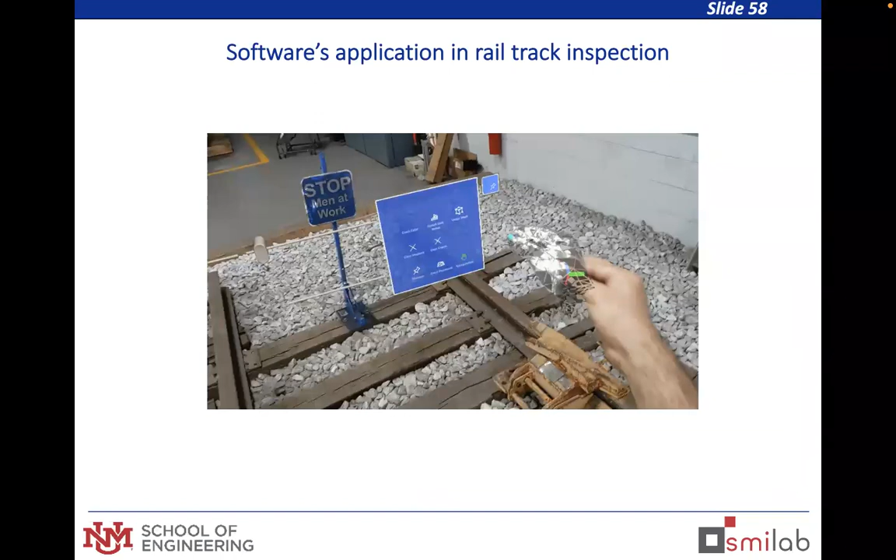Commercially they do it sooner than us, but they don't actually do it. There is a lot of interest in actually creating this, as you can see in this menu here. But I don't know, again, I'm not...

We can create menus in a day, but to actually have the technical side, for example, you need to know signal processing, you need to know computer science or computer architecture, and you also need a structural engineer. Or maybe on the railroad, you need to know what the railroads are interested in, not so much the accuracy, but maybe safety. So I think it's a very, very active area these days.

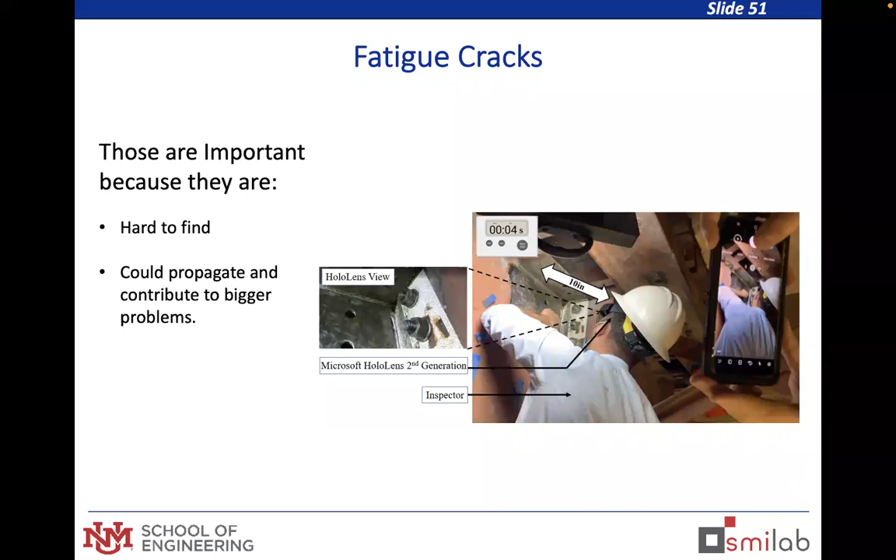So I guess you get their feedback somehow, some sort of labels they assign when they click those interactive inputs, I guess. And then I suppose you could use them as a sort of labeling to improve your classification algorithms or other options. Well, I think I can also benefit from them, so I'll think about that.

But I don't know, of course, to what extent right now it's a closed loop, right? So you might be giving them the tool and then you don't get a chance to have access to their feedback. So perhaps this is not something that's readily available now.

No, we work together. I think they're very nice, they don't take the candy and run. They can't, because even if you give them the application, the application needs to be updated, so we work closely with them. They trust us and we listen to them, and they also listen to us, but we listen to them. And when they give a suggestion on the crack width, for example, we show it to them, and then they say, hey, can you do it with an angle? Because I don't want to look perpendicular to the surface. So we just put the angle into the algorithm.

There is a question by Ayan, I guess. You could unmute yourself. Hi, Eleni. Hi, good, nice to see you. Hi, Ayan, thanks for making this workshop. And hi, Fernando, excellent talk.

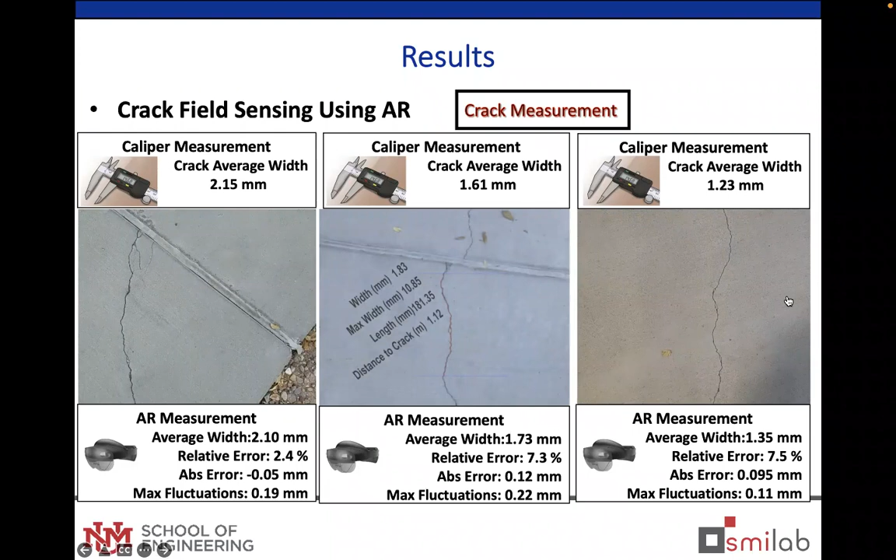My last question regarding a very basic training experience: for a typical civil engineering undergraduate student, what kind of things do you expect they should be enabled to do? Because this is going to be one of the challenges for us to engage more civil engineering students in this high-end technology. What kind of things do you envision? Do you think we should incorporate more related courses in undergraduate curricula so they are well prepared? What is your vision on that?

So this is a class with civil engineers, and what I do is take them to the field, to the sensors that they build, and they need to measure the structures on campus, and they love it. They love it. So I think the younger generations are way less conservative than we were.

We need to push a little harder—they're ready. In terms of what we can do for them, it's more about going earlier to the middle schoolers. We have a project with the railroad now where we're trying to recruit talent, not in high school anymore. Forget about high school, it's too late—they already want to be medical doctors or lawyers. So we need to go to middle school and get these sharp boys and girls and tell them this is an important problem for society. You need to be the one who creates the new civil engineering. After 300 years, now we're going to do a new civil engineering. So you have to invent it.

So more outreach to school level earlier. And also bring them to your lab. I've been very successful with these high schoolers—they program Unity, they do video games already, so at 15 and 16 they already know how to program AR. And then they stick around. I kept one high schooler with me who is now finishing his master's, for example. They also go to other places, which is good for them too, so nothing wrong with that. And the younger students also inspire the older students in your group as well.